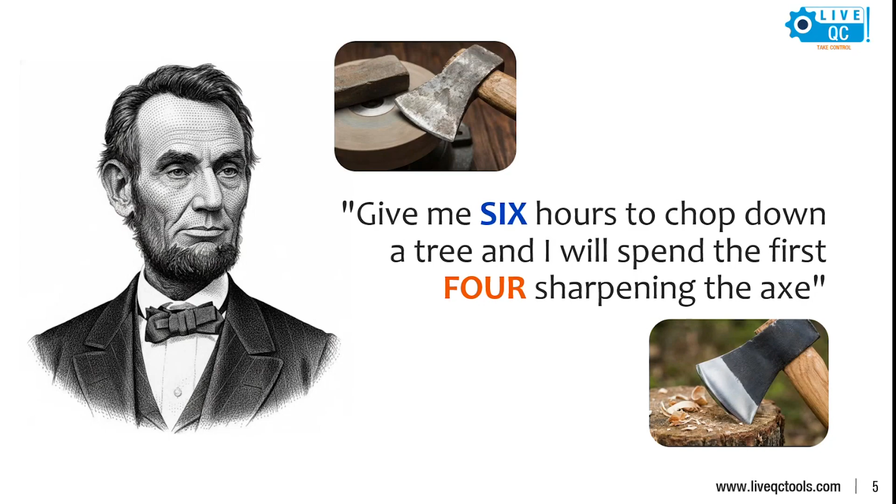But in real life, pressure pushes us all to act immediately. So we start chopping, inspections, actions, rework, without sharpening the axe. That is where inefficiency begins. One more thought: Einstein takes this thought one step further. He emphasized that understanding the problem deserves the majority of our time.

But actually what happens in organizations is exactly opposite, correct? We rush into solutions because customers are waiting, management wants closure, audits are approaching. Unfortunately, a solution built on a weak understanding of the problem will never be stable.

Before the session, I just want to clearly set some expectations for today. This session is not about filling formats or satisfying audits or closing issues faster. It is about thinking clearly, defining problems correctly, and eliminating causes permanently. If you leave today with a different way of thinking about problems, this session is successful.

8Ds are often misunderstood. It is not a form, it is not a checklist, it is not just a customer requirement. 8D is a structured way of thinking that forces us to slow down, challenge assumptions, and use logic instead of guesswork. So before we go further, I have a quick introduction.

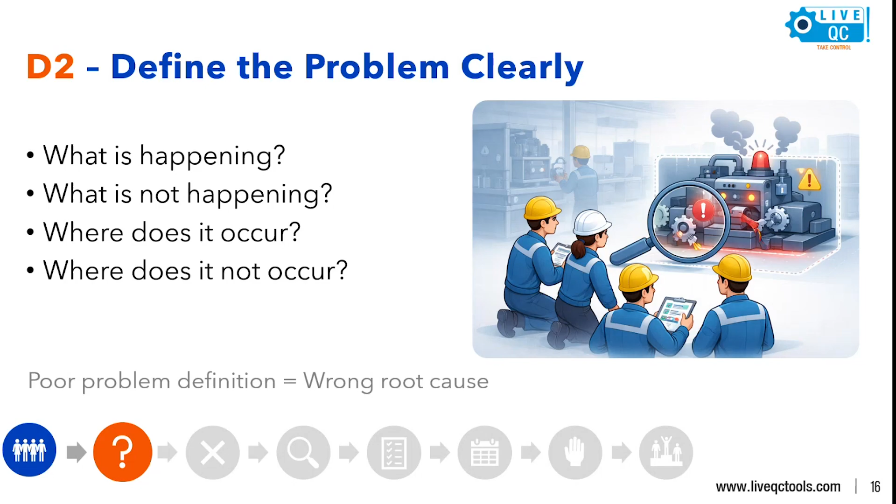That is D2. Then D3, which we can call interim containment, or stop the impact. D3 is about protecting the customer. Containment actions are temporary by nature—they stop the impact but they do not solve the problem. Inspection, segregation, rework are not solutions, they are just safeguards. So if you see containment becoming permanent, it means the root cause is still alive or active.

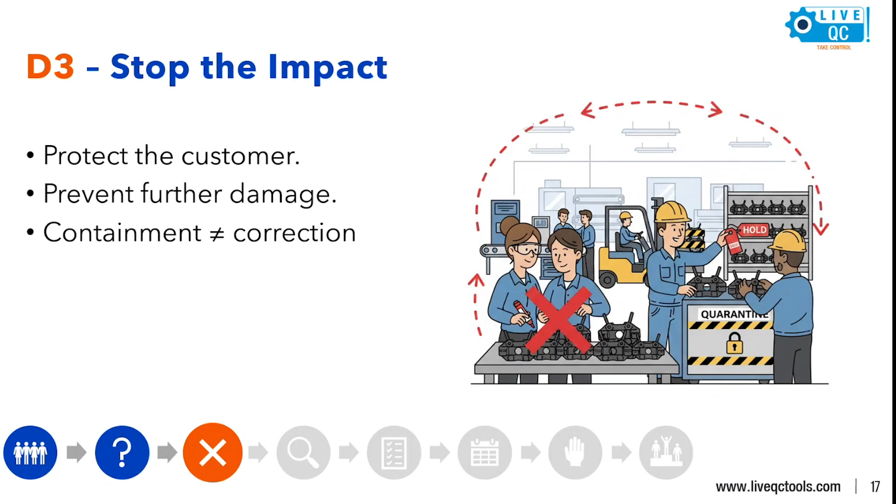D4, that is finding the true cause, or root cause analysis. This can be called the heart of 8D. Root cause analysis is not about finding a quick answer, it is about finding the right one. Most of the time, common mistakes include stopping at the first why, using assumptions, or blaming people. A true root cause explains both why this problem occurred and why it did not occur elsewhere.

Ford once received a complaint that a car is having a starting issue after the customer bought vanilla ice cream—not any other flavor, only vanilla ice cream. At first it sounded illogical, even very funny, right? But instead of rejecting the complaint, Ford investigated. They discovered that the real difference is not the ice cream.

Actually, it was time. But if someone knows what is the actual issue regarding this specific incident, you can share your comments in your chat itself. So what is the actual technical issue related to this specific incident? You can share your thoughts there.

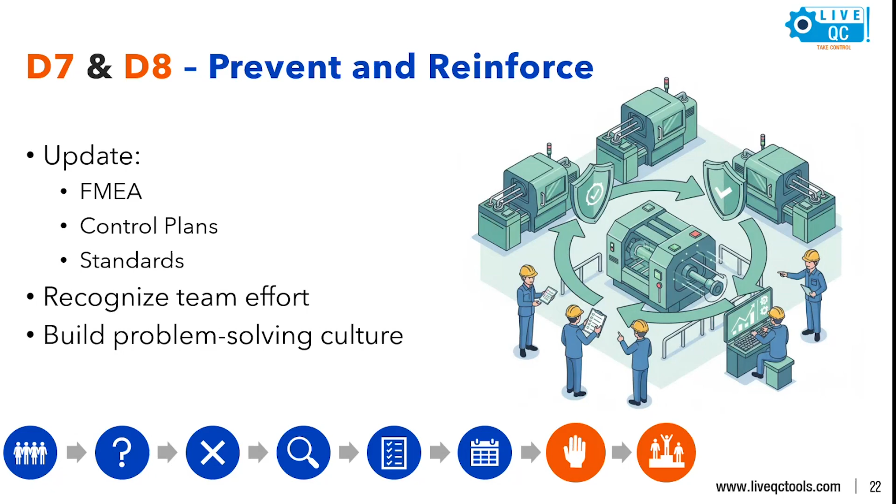So why does 8D work, when done correctly? When done correctly, 8D enforces structured thinking, prevents premature solutions, and drives learning. This is how organizations mature from firefighting to prevention. This is what it means to sharpen the axe, as Abraham Lincoln said.

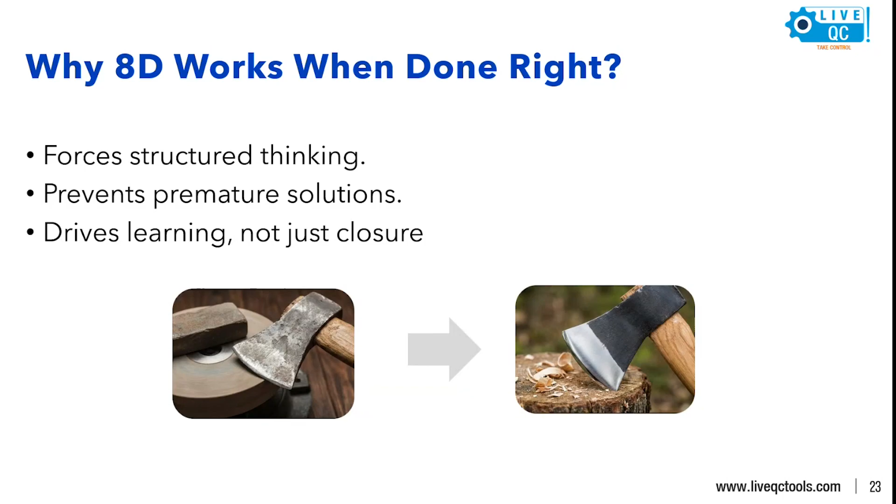Up to this point, we have walked through all 8 disciplines of 8D, from team formation to recognition. What we've really discussed is how problems should be corrected. But there is an important reality we need to acknowledge: knowing the methodology and executing it consistently are two different things. This is where many organizations struggle, not because they lack knowledge, but because they lack execution discipline.

In most cases, the challenge in manual 8D execution is that most organizations today are still managed through emails, spreadsheets, documents, and disconnected systems. As a result, information is scattered, ownership becomes unclear, and data is duplicated. This is why digital tools are no longer optional. The current manufacturing and engineering environment demands speed, traceability, and accuracy. Customer expectations are higher, product complexity is increasing, compliance requirements are stricter. In this environment, manual problem solving systems simply cannot scale. Digital tools are no longer about convenience, but about control, visibility, repeatability, etc.

By now it is very clear that for effective problem solving, we have to keep this context in mind as we move from theory to practice. I will now take you through one of the real case scenarios, a case study, step-by-step, using a digital platform to show how structured problem solving actually works in real time.

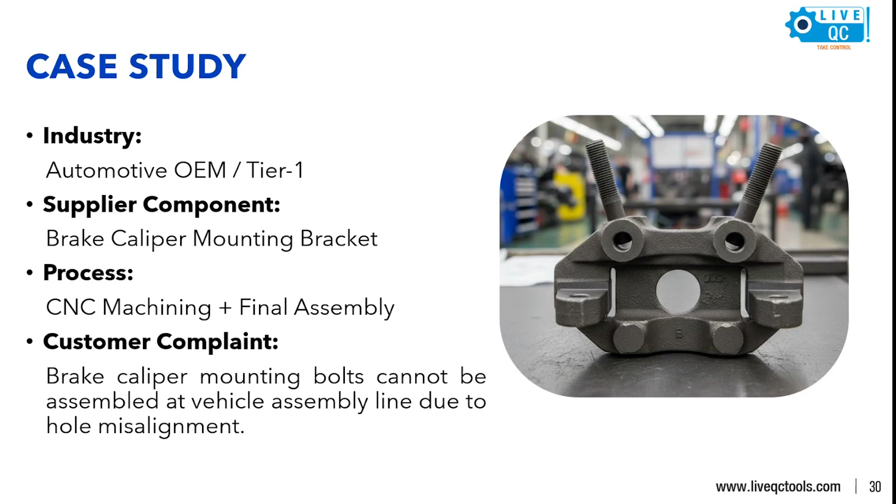In this stage, what I'll be doing is issuing the tool called D1 first. I have to recognize the issue first: the assembly line reports difficulty in assembling brake caliper mount bolts, resulting in line stoppage and rework. What you're seeing is a tool already available in LiveQC Tools, the live issue module.

There you can log in the issue details from here. Once you have put those details into the module, since this is a repeated task on a safety critical component, the formal problem solving approach is triggered instead of a quick fix. In the system, this is captured as an issue, ensuring traceability from the very beginning.

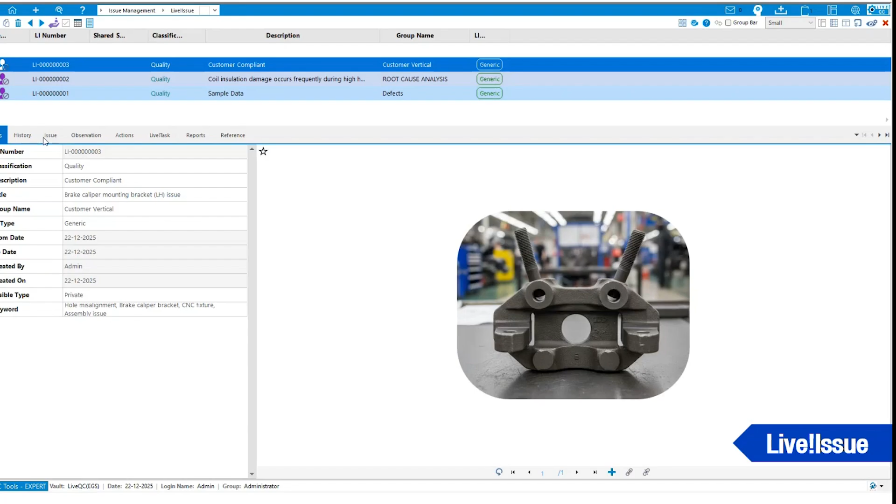The next step is team formation. Once the issue is logged, the next step is to form the right team. We define a cross-functional team, as already discussed, that should contain people from quality, manufacturing, CNC programming or maintenance, and production, whatever the area we are dealing with. The important point is that it's not about hierarchy, it is about process ownership and expertise. The tool ensures that roles are clearly assigned.

From these images, we can clearly see which areas we have assigned different users to, whether from quality engineering, CNC programming, production supervision, or supply quality — different people across roles. Here roles are clearly assigned, responsibilities are very visible, and ownership is explicitly provided.

Now this is the other side of the coin, what is bad practice in team formation. This is a common process adopted when following bad practice: the team is formed only with quality engineers. Most of the time people include only quality staff and no one from other departments, so there's no production or maintenance involvement. Team members have no authority to change the process, and names are added just for formality. These are the bad practices we can see in D1, the team formation step.

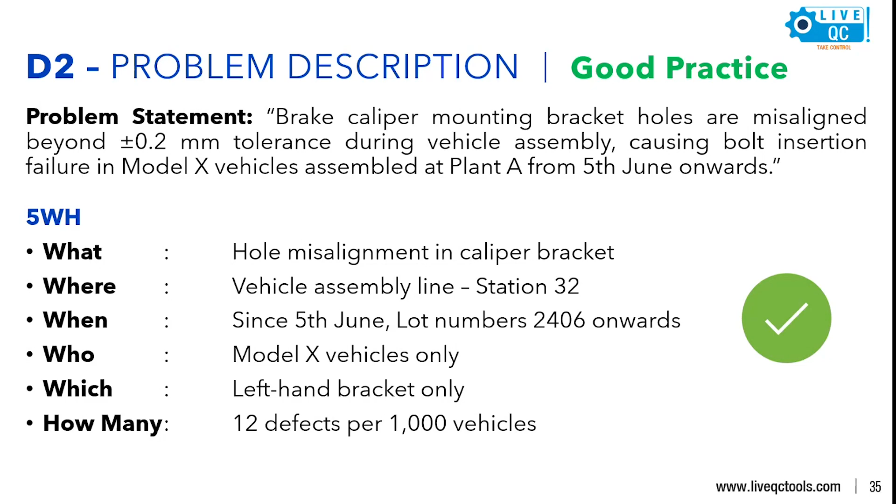Now we move to the problem description, D2, where we define the problem correctly. Instead of a vague statement like 'hole issues observed,' we structure the problem using different methods, such as 5W1H or 5 Why. What exactly is wrong? What is exactly happening? Which product, which line, which side — these details can be easily captured here, which prevents unnecessary investigation outside the scope.

What you're seeing is the customized form already available in the 8D format. In D2, the problem statement, you can assign different details with dependable data and add images related to the specific activity. The key message here is that a poorly defined problem guarantees a poor root cause.

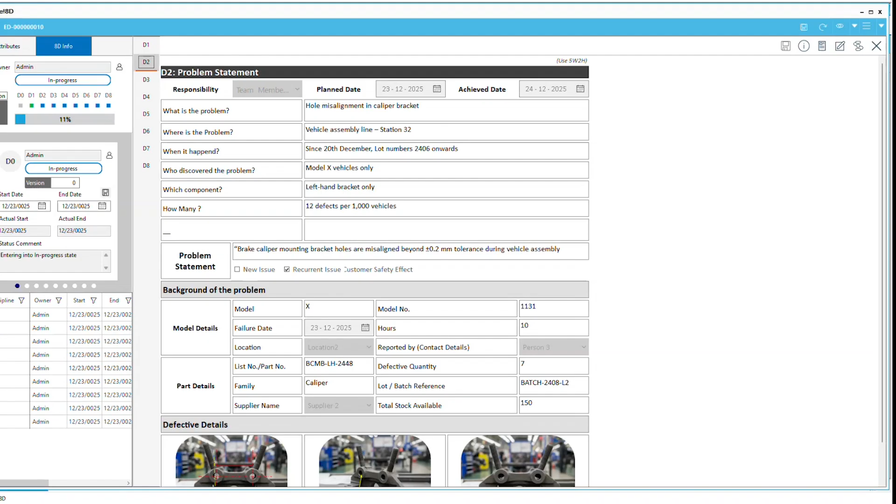Then we move to the next one, interim containment action — but before that, let's look at the bad practices when dealing with D2, the problem description. Instead of representing it in a detailed way, you get things like 'hole problem' in brackets, or 'assembly issues observed,' with no quantification, no time reference, and no boundary definition. These are the bad practice representations for D2, the problem description.

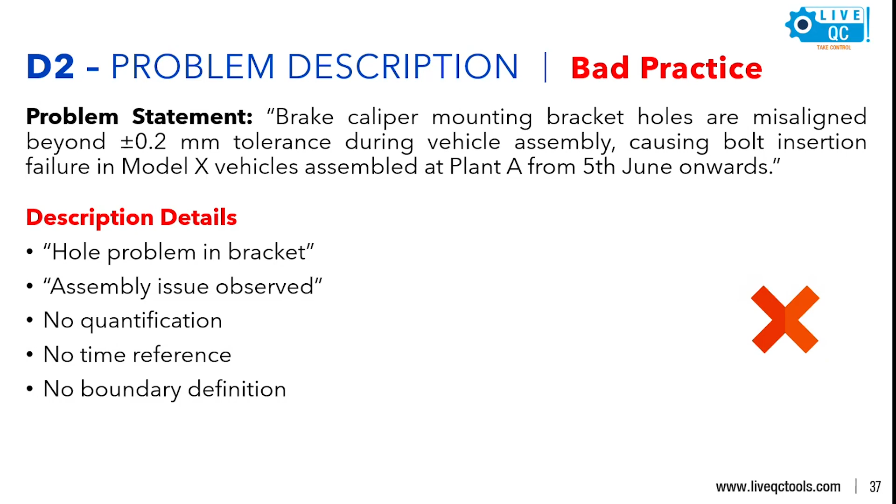D3, that is interim containment action. So before we analyze root causes, we must protect the customer. So that's the first case — we must protect the customer.

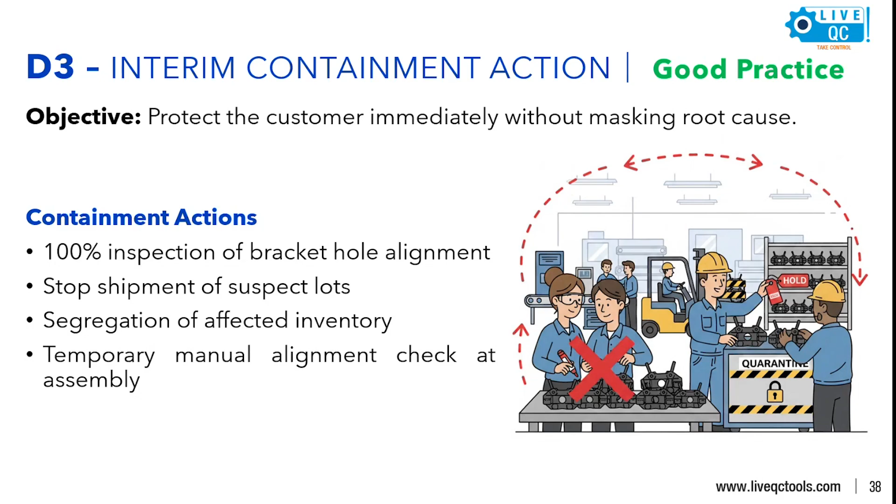At this stage, interim containment actions are very defined. Suspect lots are segregated, 100% inspection is introduced temporarily. We know that the assembly line is in a controlled manner — we will control those assembly lines. So the system tracks what containment is applied, who owns it, and when it can be removed.

So what you're seeing is the conformance or non-conformance of the specific product, and we'll be assigning those details to the live NC module, so it can be shared with the different users who will be responsible for this NC activity. Importantly, this containment is also temporary, which is not a solution.

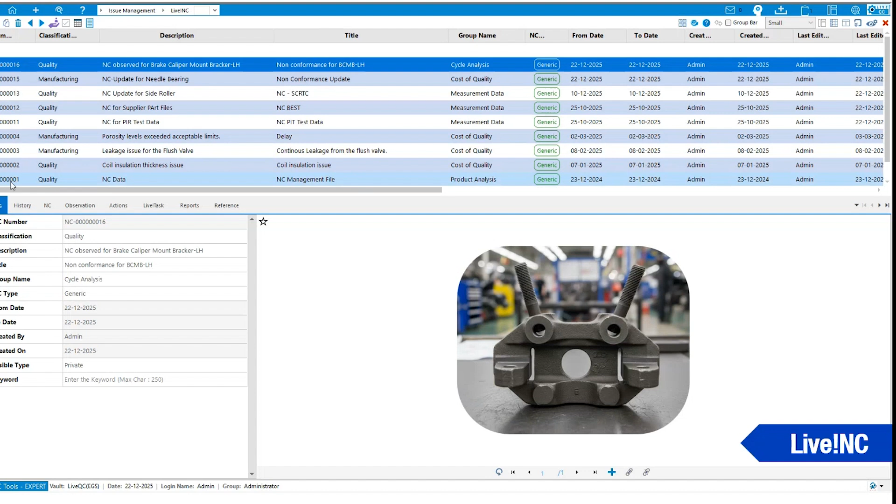So what is the key message from here? Containment stops the pain — it temporarily stops the pain, but it does not cure the disease.

So what are the bad practices that we can see in interim containment action? Adding inspection permanently — we're unwantedly increasing the cost of precision. Then calling inspection a corrective action. No traceability of inspected parts. No exit criteria for the containment. So these are the different bad practices that we can see in interim containment action.

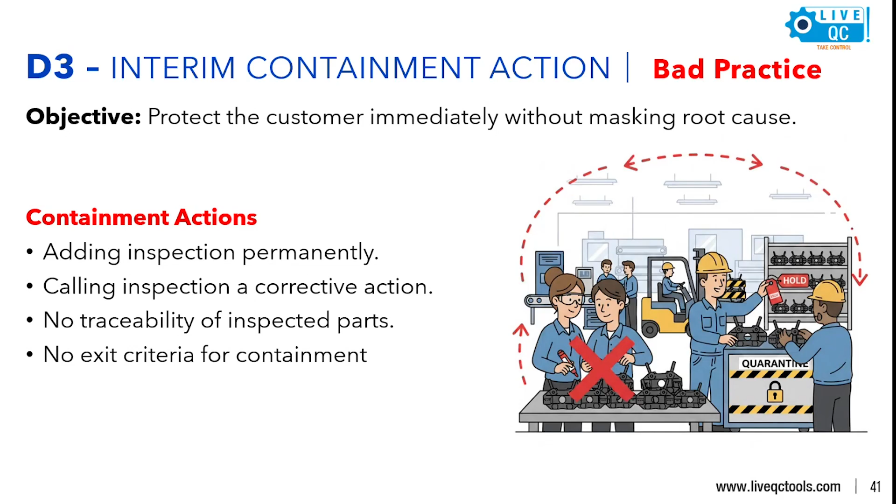This is the heart of 8D, where we conduct a process flow review. We can see that we'll be using a multi-tool approach — we can use the process flow chart, fishbone diagram, or 5-why analysis, any format that you want. You can link it through the D4 format.

Once you have set the process, there is a certain procedure to follow. We'll be starting with step 1, that is the process flow chart. What are the different good practices when preparing process flow charts? We'll be properly defining what are the different steps taken care of in this specific activity.

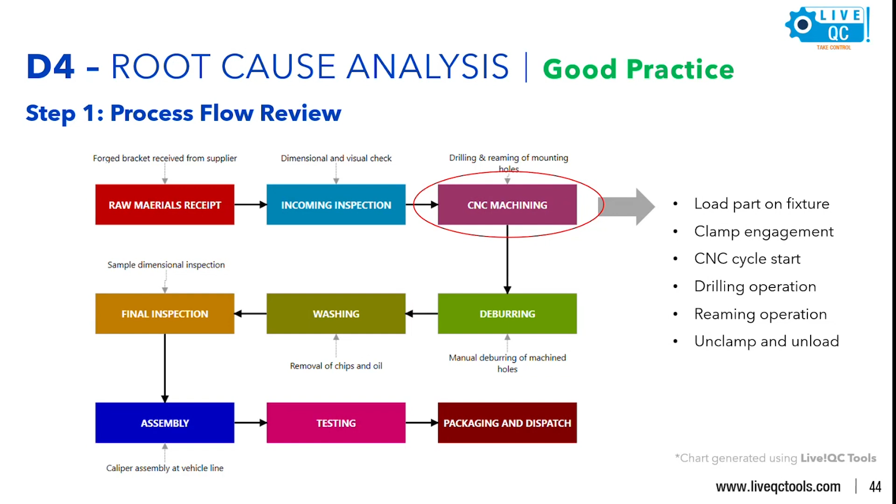We already know the issue is coming at the CNC machining area. So we know what are the different areas or procedures for the CNC machining activity, and what interim actions can be taken, what observations, what evidence we can gather from this specific area. This is not limited to CNC machining.

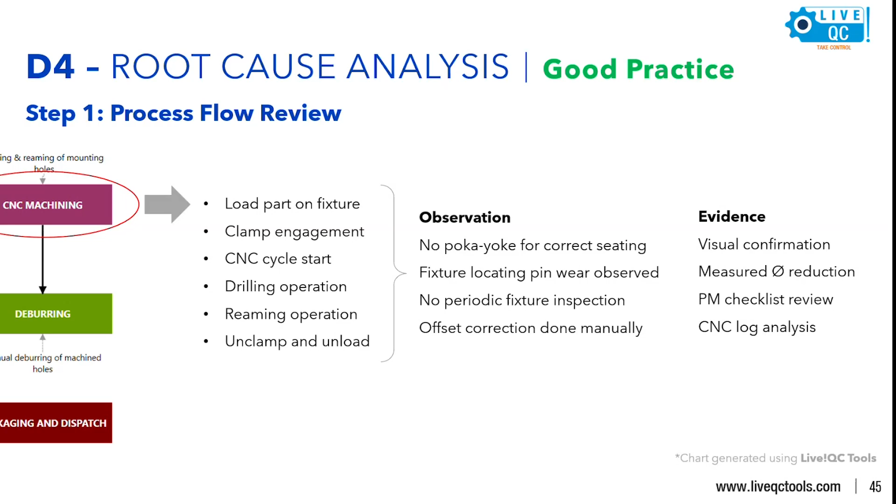We can also take it for different steps already in the process flow. But we have already analyzed it is happening at CNC machining, so we just found out which are the different areas that I can explore for the root cause analysis section. Once you have identified the targeted area, then we can go for the next one.

What are the different bad practices when going with the process flow review? Using outdated flow charts, reviewing the process in the meeting room only and not physically verifying the process, skipping sub-steps. If you are skipping the sub-steps, you can always expect there will be missing critical points in the upcoming stages.

Once you have properly validated this, then we can go for properly identifying the content — the potential causes identified through these different methods. It can be a 4M, 6M, or 8M, which contains man, machine, material, measurement, mother nature, and more.

So those causes are not assumed — they are validated with evidence. Once you have found some specific causes for this end result, we have to properly correlate with some data. That is the requirement for this root cause analysis. Finally, through validated 5-why analysis, we identify the true root cause.

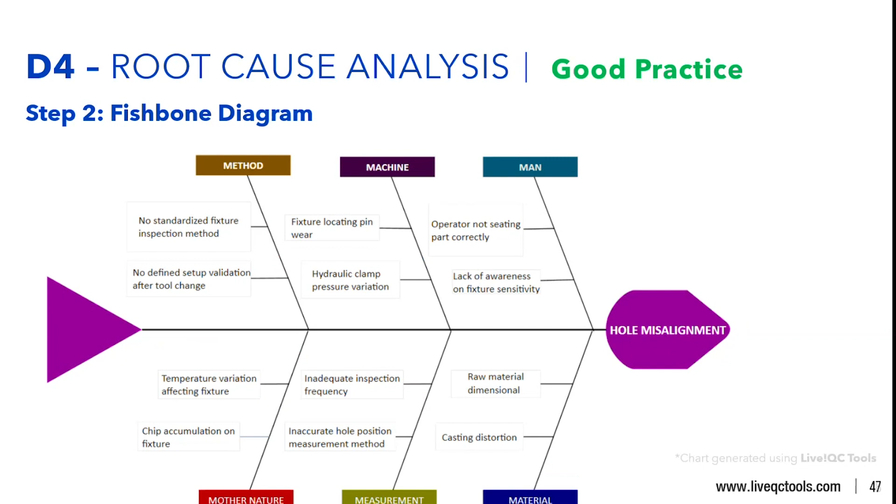Before that, I just want to showcase how we are properly segregating this 6M method through different approaches. Starting with the first one, that is man. How do we validate it? Observe multiple shifts, review training records, compare defect rate by the operator. These are the different record details that we can obtain for this specific 6M method.

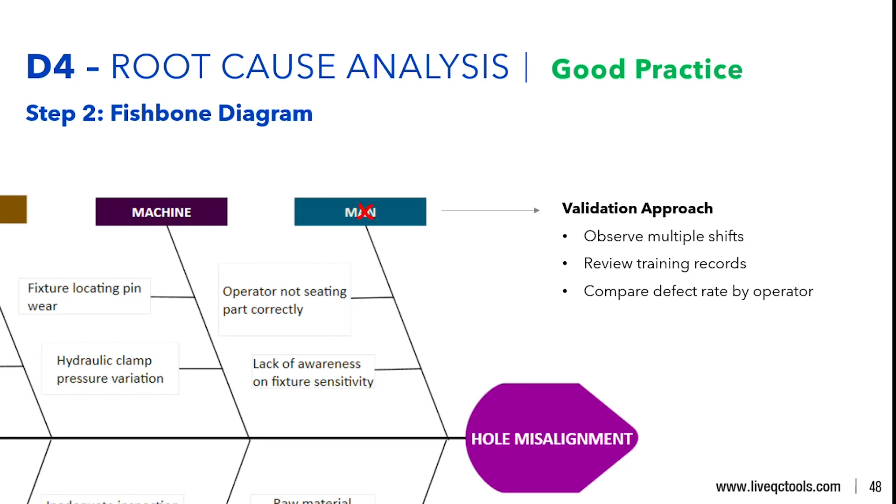From here itself, we can easily identify that man is not directly contributing to the issue of misalignment. If you check with the machine, we can see different validation approaches: measure the locating pin diameter, check the clamp pressure logs, or machine capability studies. These can be easily found from these studies, and we can say that the fixture locating pin is somewhat related to our misalignment issue.

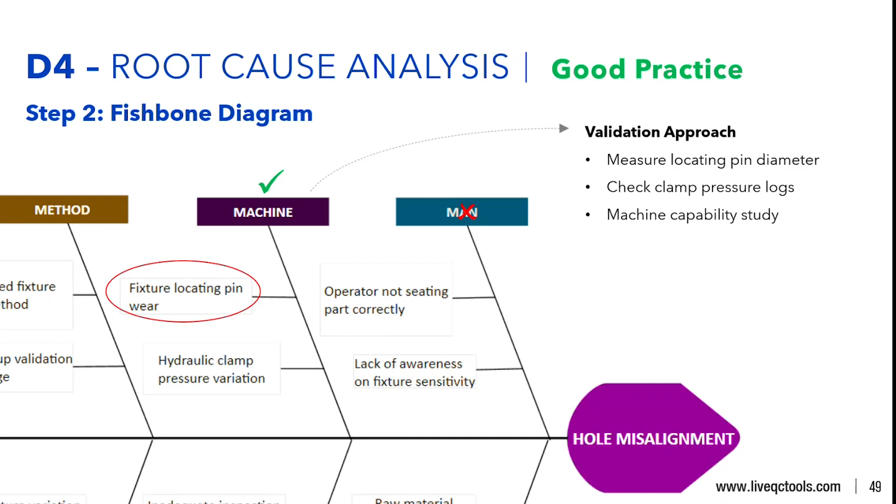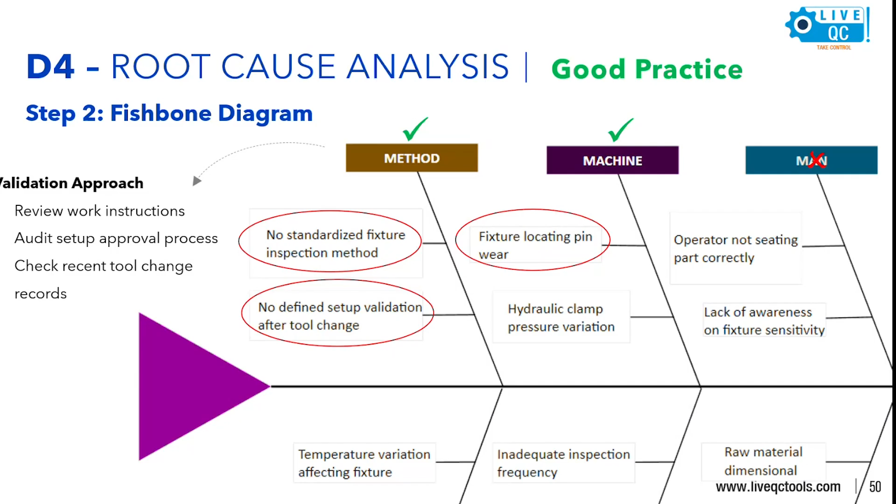In this next method, we can see the different types of methods we'll be using: review work instructions, audit setup approval process, check recent tool change records. These are the different standards which have a direct or high chance of relation with our root cause, so this will also be addressing these issues.

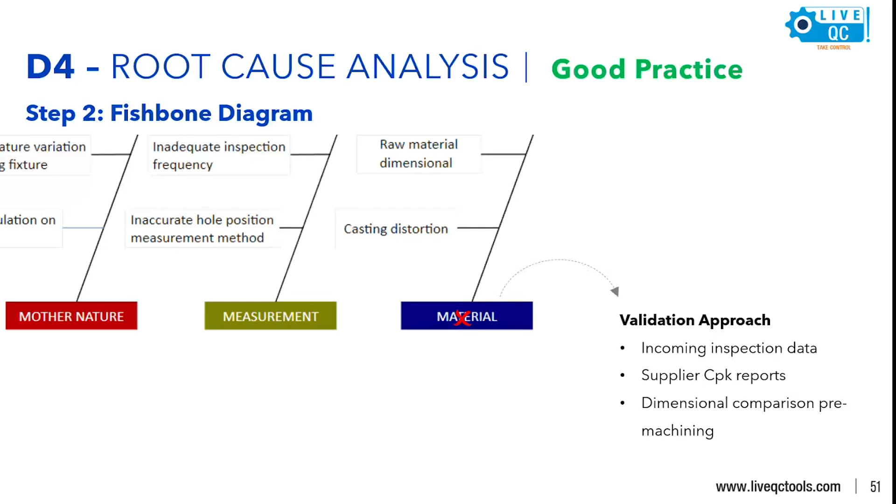The next one is material. What is the validation approach? Incoming inspection data, supplier CPK reports, or dimensional comparison of pre-machining. We can say this is not applicable to our specific issue, so we can easily omit it.

The next one is measurement, which also won't come into picture. For the validation approach, we can say gauge calibration records, MSA study, or measurement repeatability tests won't come into picture, so we can eliminate that as well.

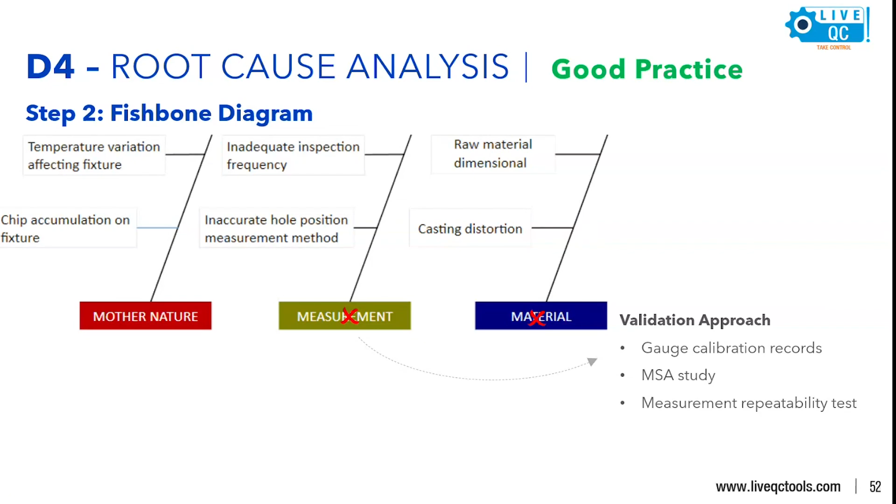And mother nature, usually called environment. In this validation approach, we'll be fetching the temperature log, visual inspection of the fixture, and cleaning frequency review. These are all different validation criteria that can be taken for this 6M activity.

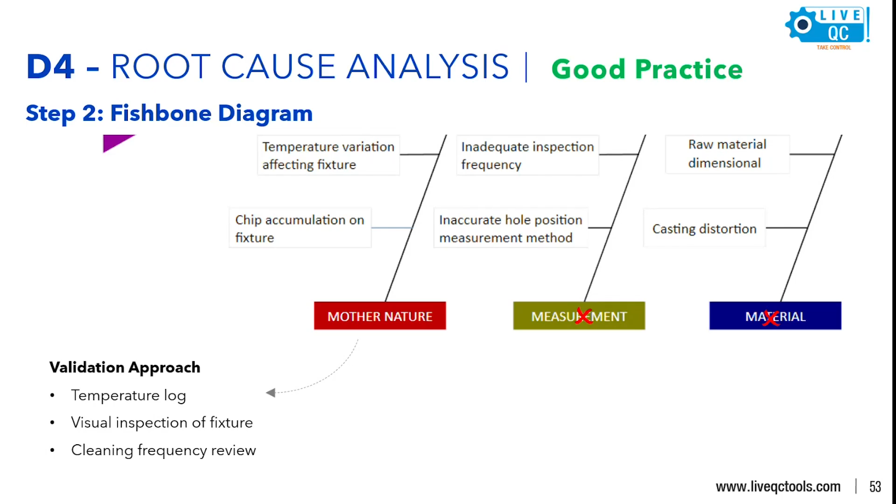Once you have found this data, the root cause is not what sounds logical, it's logical - that's what is proven here. Once we have found that, the next step is the 5 Whys, basically to identify the true root cause for fixture locating pin wear combined with the absence of preventive inspection. So the key message you can take from here is: root cause is not what sounds logical, it's what is logical.

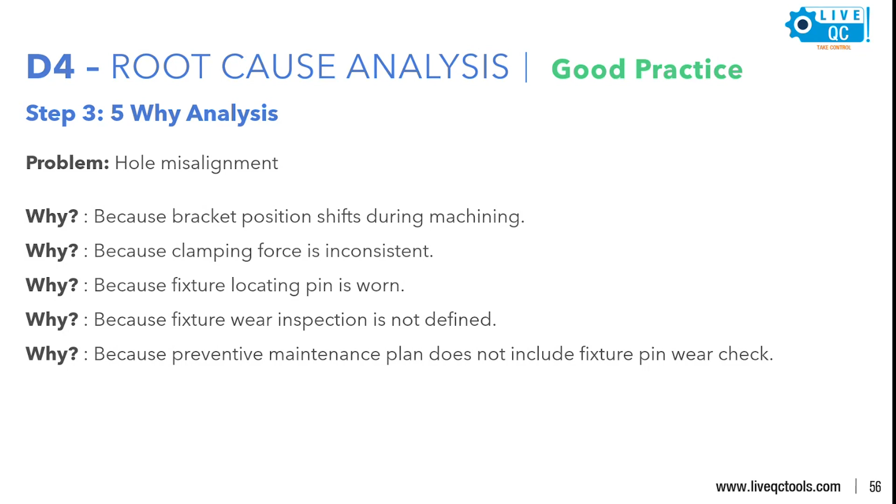Next one is D5. What we have seen is the good practice, and the next one is the permanent corrective actions for D5. Once the root cause is confirmed, we define permanent corrective actions.

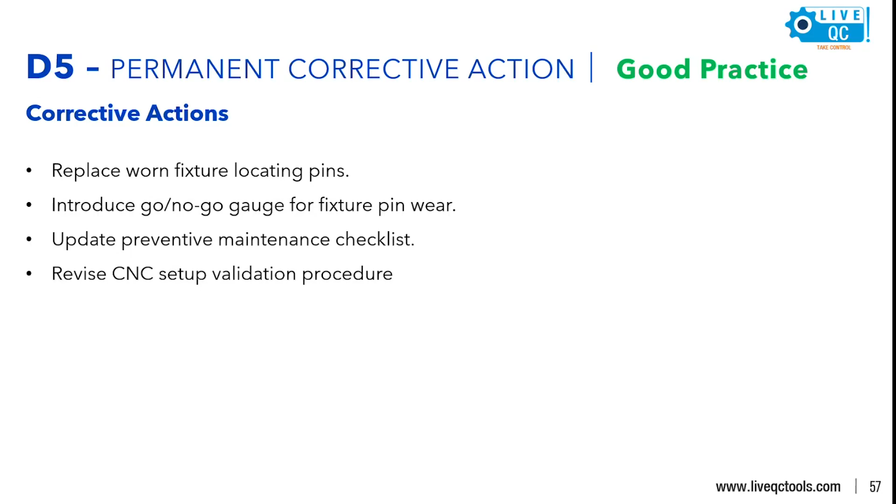These actions are not focused on inspection training, but on changing the process itself. So fixture pins are replaced, preventive maintenance is updated, and setup validation is enforced. Each action is linked to one responsible owner, and we can also include implementation evidence, target dates, and verification criteria - all this data is provided in the corrective actions area.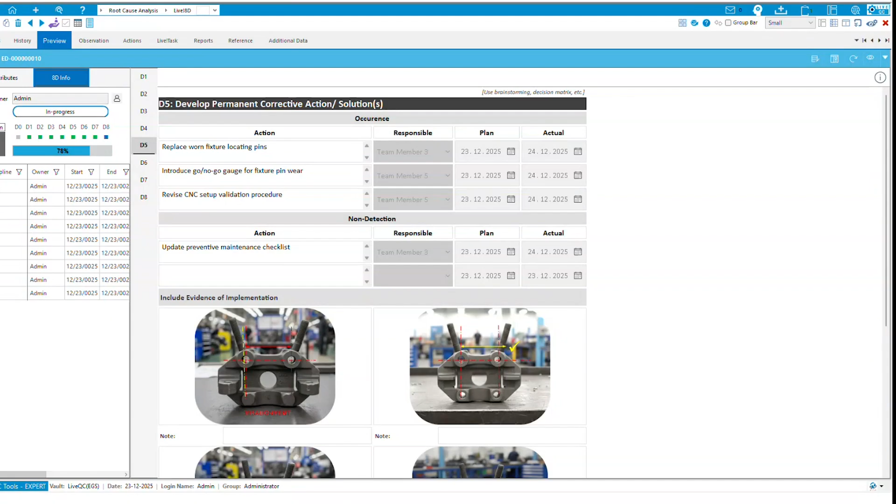So what key message can be taken from here? If the process doesn't change, the problem will return. These are some bad practices we can see in D5: corrective actions like operator retraining only - that's the most repeated phrase used in 8D forms - additional inspection, be careful instructions. These are vague instructions representing bad practice in permanent corrective actions.

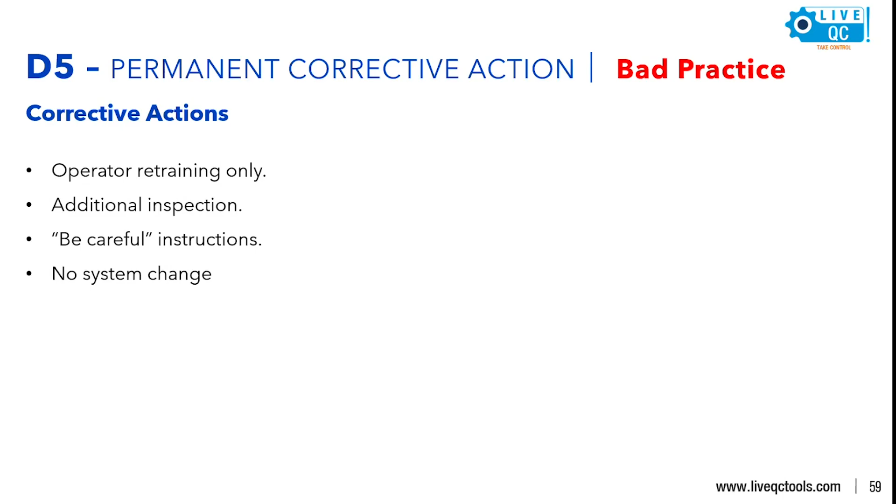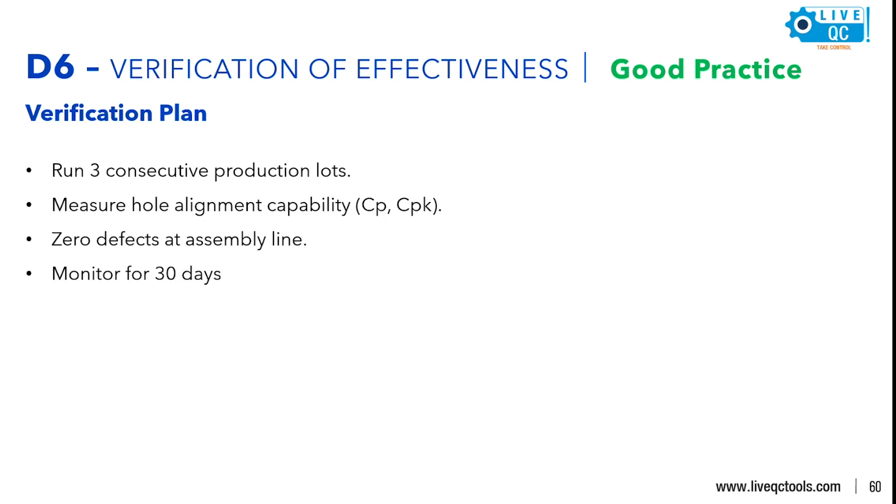Next is verification of effectiveness. Corrective action is not complete until it is proven effective. Here, effectiveness is verified using real product data - hole alignment capability is measured, assembly defects are monitored over time, and performance characteristics before and after implementation are compared. Only after sustained results are confirmed is the action considered effective. The key message here: implementation without verification is assumption.

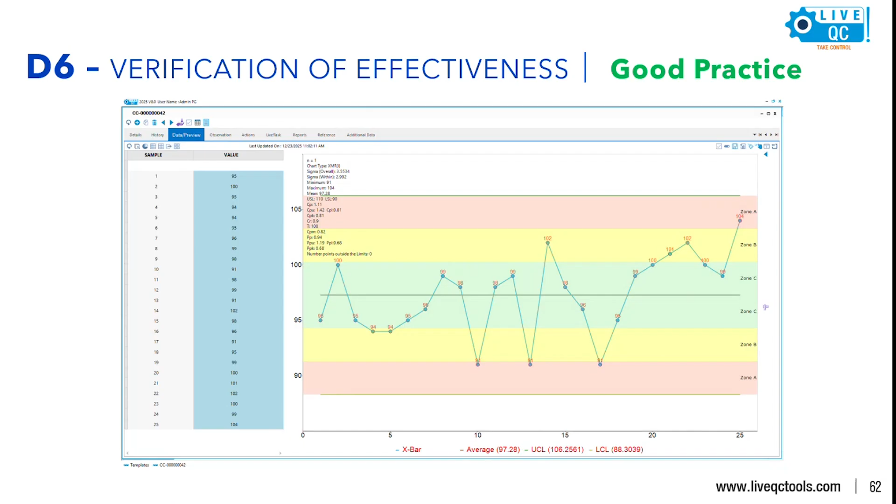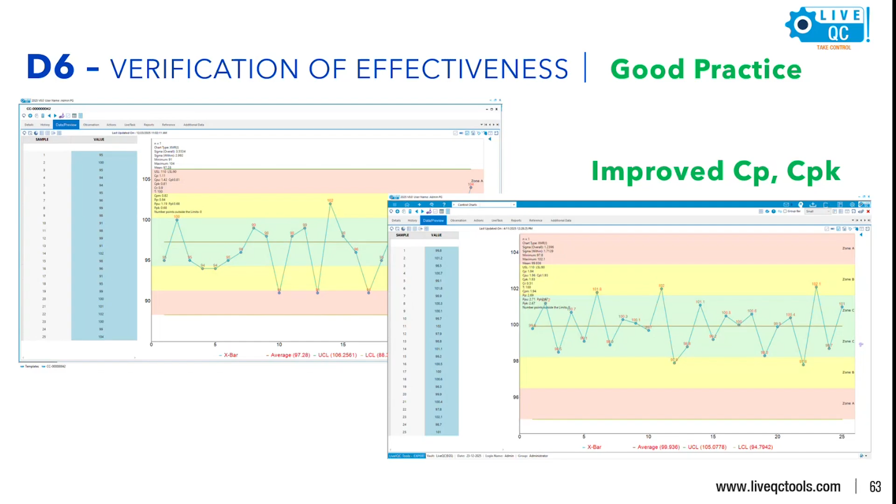Let's see the different verifications for effectiveness we can use. This symbol is an example from SPC - nothing but control charts. This is previous data taken for the root cause analysis section. After the study and implementation of corrective actions, we got an improved CPK from the data inputted through LSL and USL. So here we are properly providing real data as evidence for the improvements in the process. The next one is what we can do.

So verification, then what are the different bad practices that we can see in D6? Closing immediately after implementation, or no data comparison, or not defining the verification period over here. So this is where many organizations stop, but this is where real quality begins.

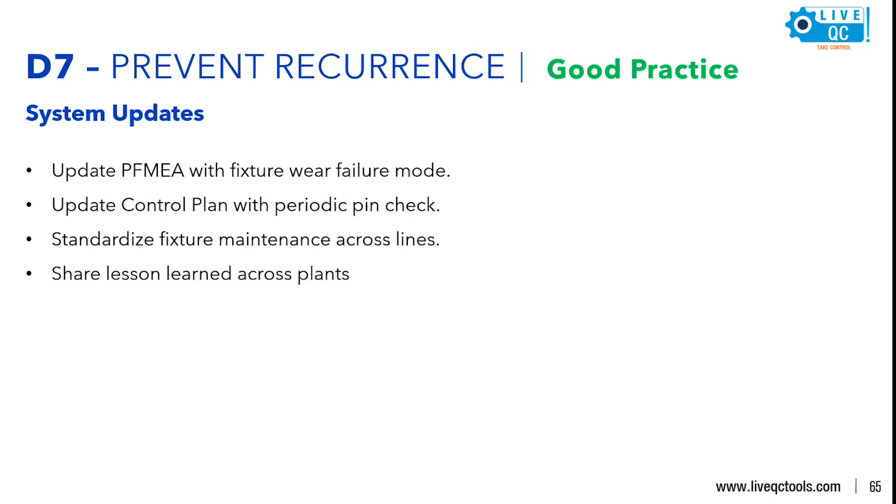So learning from these issues are now institutionalized. We know that PFMEA is updated with the actual failure modes. So here, this is D7.

Here you can see implement preventive actions. Here we define which documents need to be updated, whether it's applicable, who is the responsible person, and what is the target date. So those kinds of updates need to happen, because most of the time institutions are not updating based on their relevance. So here we'll be updating the PFMEA.

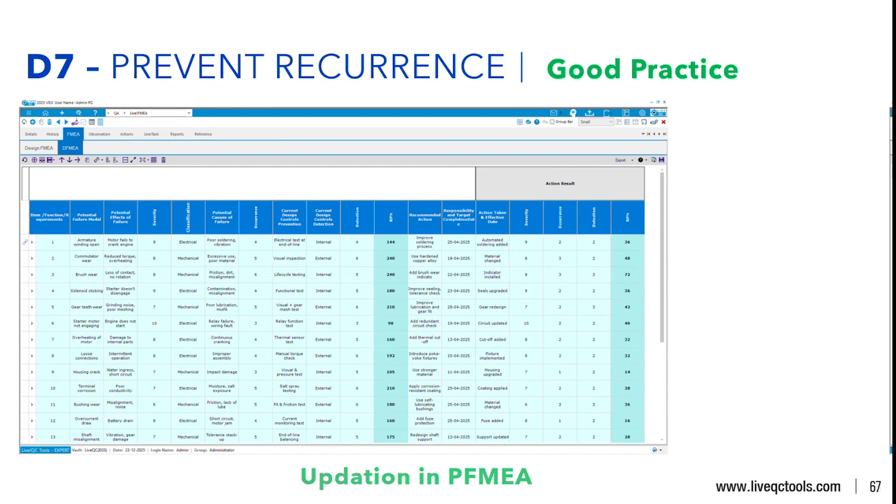The PFMEA is updated with the actual failure modes, and the control plans are revised. So preventive checks are standardized across the lines. This ensures that the same problem does not appear in a different form.

So what key message can we take from D7? The prevention turns a solved problem into organizational learning. So these are some of the bad practices you can see: no FMEA updates, local fix only, or no knowledge sharing.

So coming to the next one, how it will be closed: team recognition and closure. Finally, the team's effort is formally recognized and it is closed only after all actions are verified. System updates are complete and the learnings are documented. Recognition reinforces the right behavior and strengthens the problem solving culture.

So from this session, the key message is: closure is not the end. It reinforces the discipline of the 8D structure.

So what are the good and bad practices we've already seen. In good practice, we always see acknowledgement for cross-functional effort, and we share the success story internally through mails, paperwork, or newsletters, reinforcing the problem solving culture.

So what are the different bad practices we see in D8? No closure communication, treating 8D as punishment, and no appreciation. So these are the different good and bad practices we see from the D8 section.